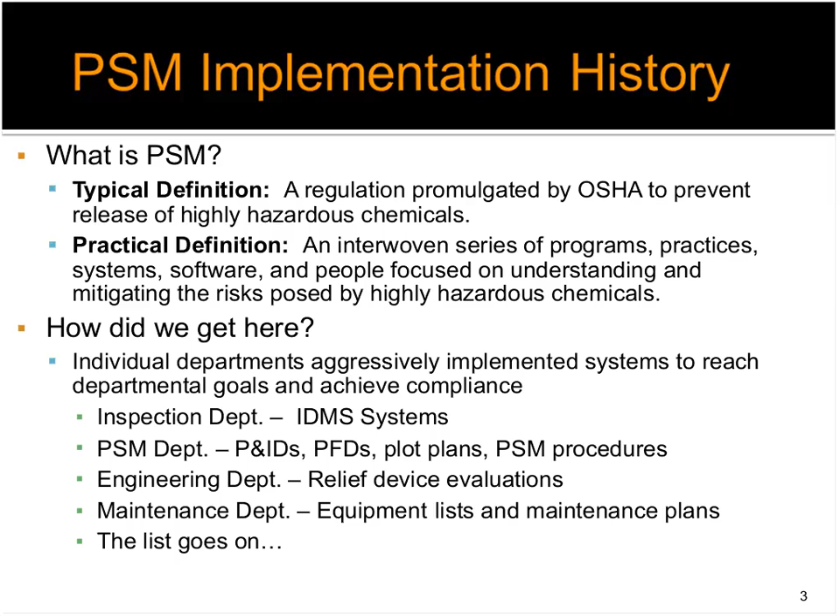And then maintenance departments had to implement maintenance plans and schedule maintenance routines and generate procedures. So you can start to see that PSM isn't just one component of an organization. It's not just one system, one process. It's really a series of different components, processes, and systems. And as I like to say, it's really interwoven.

So how did that leave us? Where are we now? Well, where we are now is we have lots of different systems and processes and databases, and similar process safety information, PSI, resides in all these different systems and applications. And that's really across many different departments. And today, each system, software, and application serves a purpose, and they must be maintained. You can't arbitrarily eliminate one.

So if someone came to you and said, hey, we have all of our pressure vessels listed in our inspection data management system, oh, and we also have all of our pressure vessels on our P&IDs, I think it would be clear that just because we have similar inventories and listings in those two systems does not mean we could get rid of one or the other. They both serve a distinct purpose and must be maintained.

However, when every system was implemented, there were some unintended consequences. One was redundancy of validation efforts. So in order to implement a system, you have to go out and validate certain information, whether that be walking down P&IDs or confirming equipment information. And since everyone did it individually, for the most part, there was a lot of redundancy of efforts.

Each effort really resulted in isolated data silos that are stored and maintained separately from each other. And what's even more unfortunate, they weren't structured to benefit each other. So you might have all your maximum allowable working pressures, MAWPs, for all your vessels in multiple locations: on your P&IDs, in your inspection data management software, as part of your relief system design. And that's just how things grew. They grew organically by each individual department, and that's where we are today.

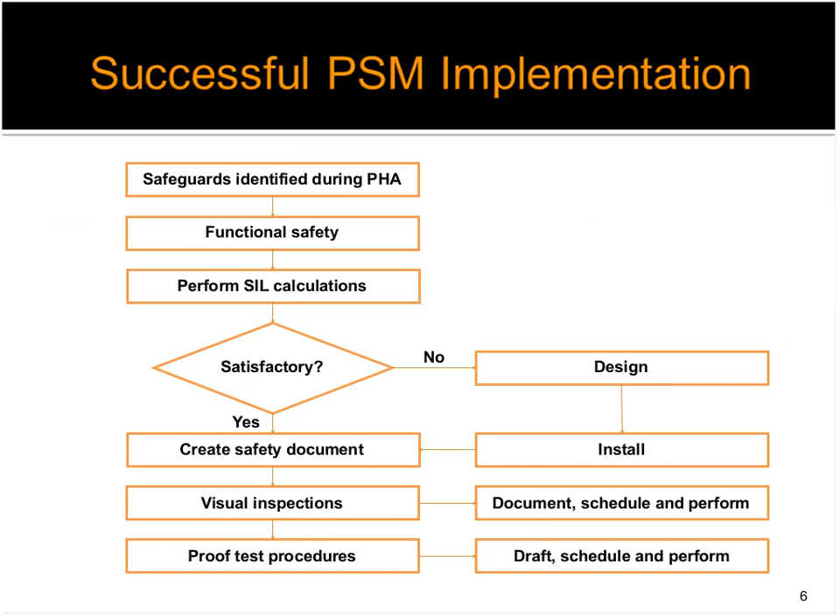Real quickly, I've talked about the different systems that have been implemented, and I've mentioned this emerging process in practice, the IPL Lifecycle Management. So as part of PSM kind of continuing and growing, I'm going to use this as an example to show you how to apply the 4 different components that I think breed success in PSM implementation and maintenance.

So just to get everyone on the same page, kind of similar to what I did with PSM history, when a PHA is held, you frequently identify different scenarios and the risks, and then you identify how those risks can be mitigated. And the way you identify the risks is through causes of abnormal operation and the consequence, and then you look at what safeguards and independent protection layers you have to protect against certain consequences. So you come up with a risk ranking, and then independent protection layers and safeguards are used to reduce the risk.

Those IPLs and safeguards then go through a life cycle management, and a lot of facilities and organizations are really now getting their hands dirty in this life cycle management. So they take those PHA safeguards, and then they feed them through a functional safety assessment to make sure that the way that the PHA understood the response is accurate. Then they perform some SIL, safety integrity level, calculations, to make sure that they will be as reliable as you would need in that particular scenario. If it's satisfactory, you kind of move on. If not, you redesign it potentially.

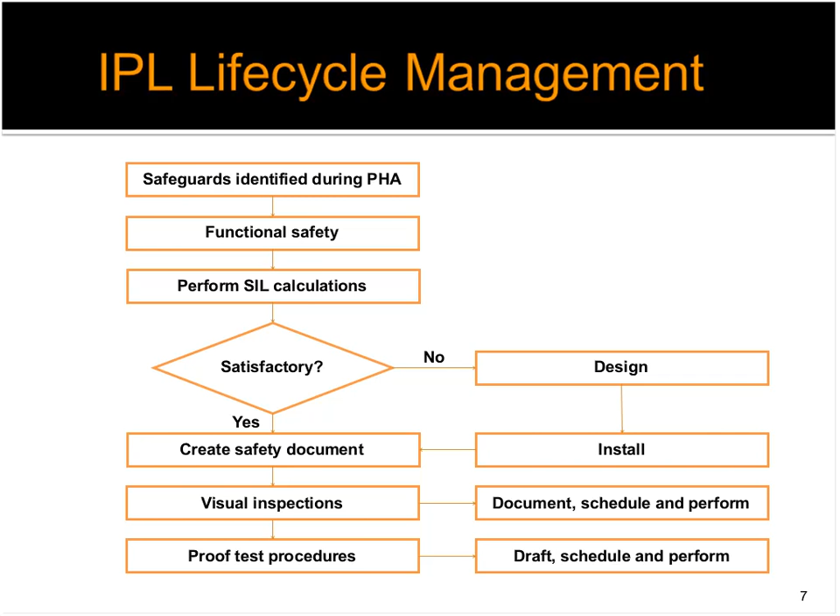Okay, let's go into the 4 components of successful PSM implementation. The first is employee participation. This is actually one of the 14 elements of the PSM standard. And this is the only one that I correlated directly to a PSM element. And I think this is much more than just compliance.

Whenever you talk about employee participation, this is not just the regulatory and kind of obligatory, hey, make sure you have the right attendees in a PHA. Let's make sure we have an operations representative and a process engineer and someone that understands the hazard analysis techniques. This is much more than just the obligatory attendance in a meeting.

This is about setting your culture. This is about buy-in from the right people. And this is really something that has to happen at all levels. I think frequently people talk about management buy-in to PSM. I don't think that enough attention is given to some of the other levels of the organization, the technician level, the operator level. Generally speaking, I think everyone sees the value, but they only see the value after it's been explained and after they understand it.

I think a lot of resistance to PSM programs is due to lack of understanding. They don't understand why they're doing certain things, why they're being required to do certain things, but with that understanding comes acceptance and even support. So one of the things I've always considered when I've been part of an implementation or maintenance of a PSM element or program is that teaching is a critical aspect of that implementation.

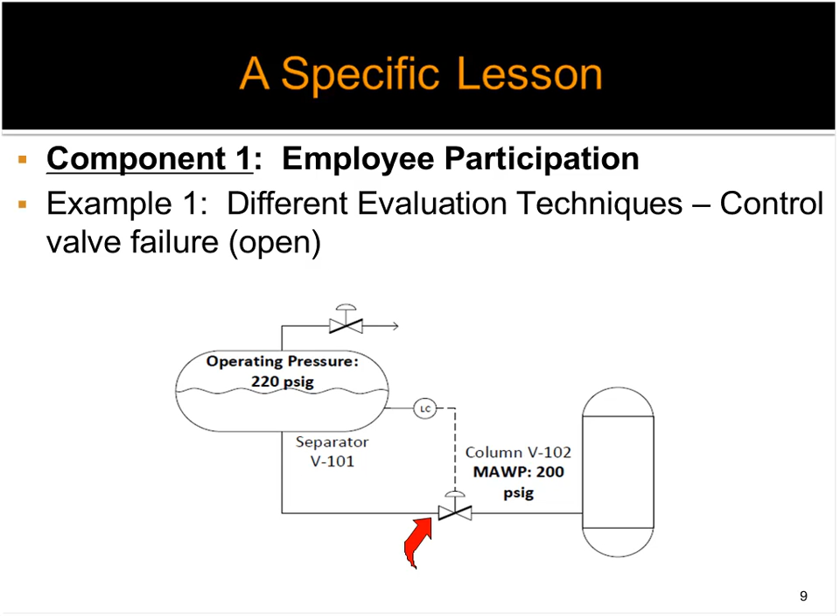So one of the frequently evaluated scenarios is what happens if that control valve fails open? Well, that is actually evaluated in a couple different ways. One, it's evaluated as part of the PHA. And as most people on this call know, PHAs take a very risk-based approach to evaluation of scenarios. They try to assess the risk of something going wrong, and they focus on the risk. So when a PHA looks at this, they may say, oh, well, if that control valve fails open, then we might lose the liquid level in the upstream vessel, and we could have what they call gas blow-by, so high-pressure gas blowing through to the downstream vessel that normally doesn't see that high-pressure gas.

Well, if it's operating at 220 pounds upstream, and the maximum allowable working pressure downstream is 200 pounds, then you're arguably going to overpressure the downstream vessel. However, in a PHA, they may say, hey, the operating pressure does not significantly exceed the MAWP, so there is no consequence of concern. Even today, a lot of operating companies are moving towards thresholds of overpressure in their PHA evaluations. So until they exceed a certain threshold of MAWP overpressure, they don't have any consequence of concern.

Well, what will that do? That will result in the PHA saying, oh, there's really no significant risk if that control valve fails open, at least no hazardous risk. It may be an operability nightmare, but it's no hazardous risk. And so therefore, they may not have any safeguards or IPLs if they're just focusing on safety and environmental impacts because there's arguably no loss of containment. However, another part of the PSM umbrella would be the relief system design. And frequently, they will look at control valve failing open.

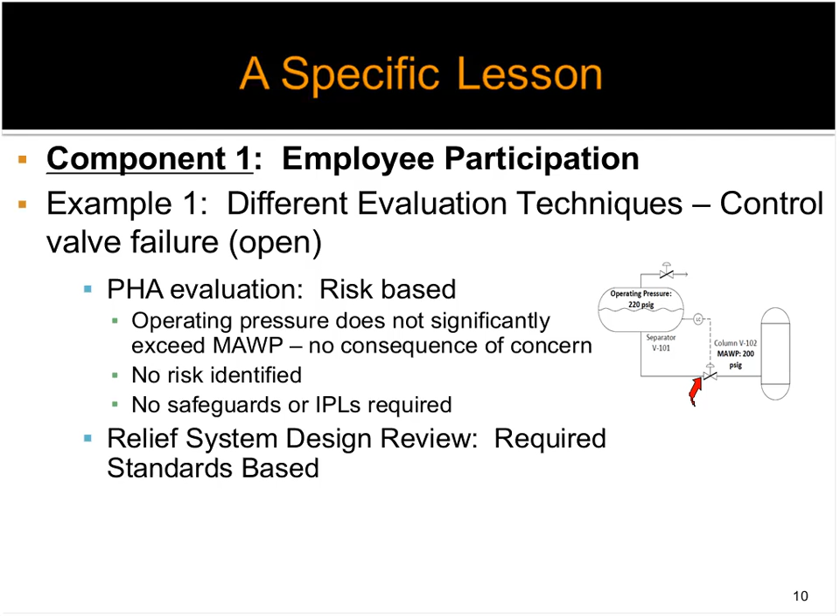And when you perform a relief system design review, this is much more standards-based, kind of prescribed methods of engineering evaluation. So what they will see is that the scenario will exceed the downstream MAWP. So if this occurs, we will exceed the MAWP. When that occurs, the regulations and the requirements and the design standards tell us you shall design a relief device to account for this overpressure scenario. So they would size it, they would look at it, and if they had any type of design concerns with that relief device, they would go out and fix them.

Now, the logical question you might have is, what in the world does this have to do with employee participation? Well, management will see both of these evaluations, and they will see the results of both evaluations are different. The employee participation doesn't necessarily mean participation in the evaluation. It means participation and understanding of what these evaluations will deliver. And so you can imagine some engineering manager receiving an engineering package saying we've got to redesign a relief device. And he says, okay, well, that makes sense. What was the scenario?

It was inlet control valve failure. And then he's just kind of curious. He's like, well, that sounds like we're going to spend some good money. I better go see what happened in the PHA. He goes and looks at the PHA, and this exact scenario says, don't do anything, arguably. So it starts to show some inconsistency in evaluation.

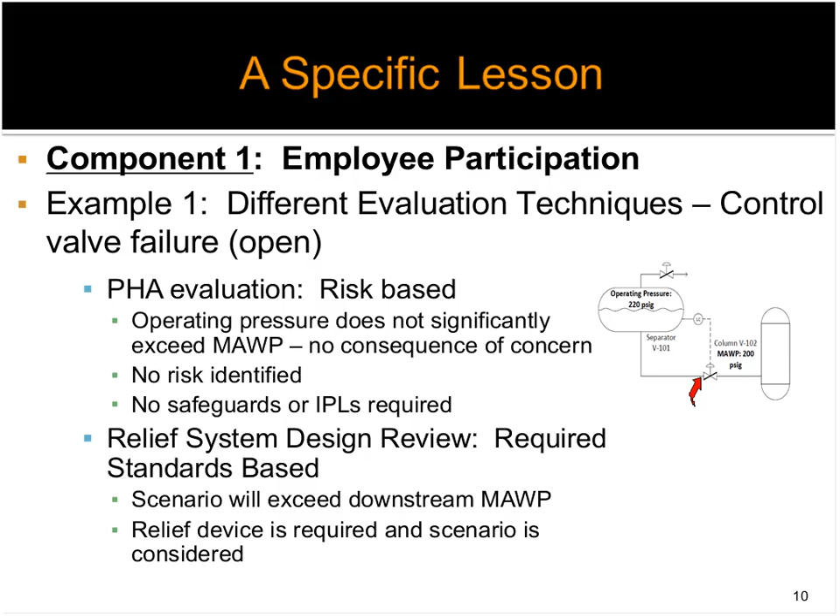Okay, so now how can we apply the component of employee participation to this new and emerging topic, IPL lifecycle management? Well, when you start to look at the IPL lifecycle management, you're going to start to plan maintenance for all of these different IPLs. And you need to start to involve all levels of maintenance from management through the craftspeople in the planning phases.

One deliverable of this is going to be testing regimes for all of your IPLs, potentially all of your safeguards. And for the most part, these are instrument-related type of devices. So basic control loops, alarms, safety instrumented systems. And so you're going to set up testing regimes. So how often you test it will be driven by what reliability is required to mitigate the scenario.

And you can imagine if you don't have the right people involved, you're now testing quite a bit of new stuff that you didn't test previously. That may require additional resources that you don't currently have. So if you were responsible for planning this IPL lifecycle management, you came up with all these testing regimes, and you just delivered it to the maintenance department, and they didn't have any awareness, all they know is that they've been dumped a bunch of work that they didn't participate in planning. That's not going to go over very well.

So the earlier you involve them, one, you'll get better deliverables. You'll know what the testing regime needs to be because, frankly, they've probably tested it before. They know where it fails. They know how to test it. And two, they can adequately staff for it. So that's part of the employee participation that I recommend in this area.

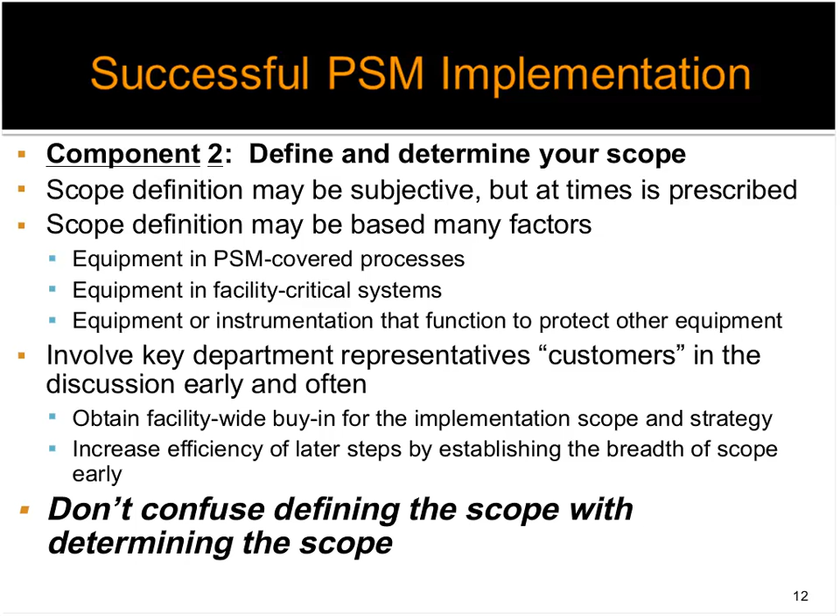So one thing I want to emphasize is don't confuse defining the scope with determining the scope. One thing that I think is frequently overlooked is if you decided you wanted to define the scope as all pressure vessels that contained highly hazardous thresholds of chemicals. That's a great definition, but then you got to determine what pressure vessels fall into that category. Well, you could say, just give me a listing of all of our pressure vessels. Well, that may not be as easy as you think. So one thing you may have to do is verify your equipment inventory, and you can accomplish that by cross-checking them against the systems you currently have.

Let's say that you were chartered with implementing mechanical integrity for fixed equipment at a midstream facility. Well, you may want to implement mechanical integrity for all fixed equipment that has certain thresholds of chemicals. Well, just getting that list may be difficult, and you may need to go to the different systems and repositories to generate a comprehensive listing. So check in between your systems to generate the reliable inventory, and you may find there are some system inconsistencies that will need to be resolved.

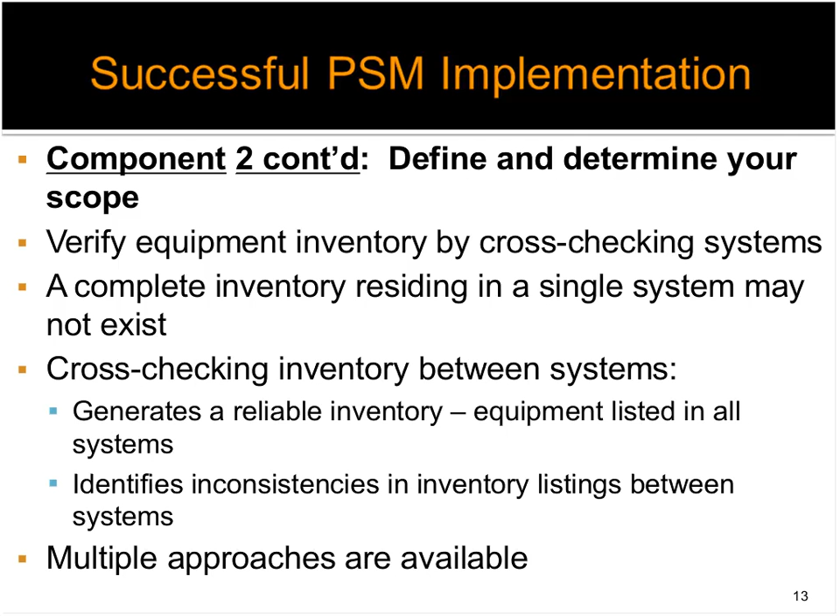Multiple approaches are available to generate that inventory. One would be simple Excel spreadsheets: do a dump from different data repositories and compare them, and you can have a resulting scoping list. You can also use some commercially available applications to do that.

So, one specific lesson in defining and determining your scope: relief device studies. Frequently, relief device studies are contracted out. So they want to do a comprehensive facilities evaluation for all your relief devices. They'll frequently just send a list to a contracting company and say, hey, give us a quote and a work scope to perform this evaluation for our entire facility.

Well, you need to really be careful that you don't understate the work and that you also don't overstate the work. One example would be if you just simply take a listing of all the relief devices from, let's say, your financial system like an SAP, and you send it and say, hey, please give us a scope of work and a cost to perform evaluations on all these relief devices.

What you may not know is that the relief devices that are on the hot water heaters in your office buildings are part of that list. And now you're asking an engineering firm to perform a study on, frankly, a pretty standard relief device that you may not want to spend the same effort and energy in evaluating as you do on one on your debutanizer column in your facility. That's an example of overstating the scope.

An example of understating the scope would be if you only provided a list of relief devices to be evaluated. Well, frequently there's vessels in the facility that aren't protected. That doesn't mean you don't need to study them. You still have some regulatory obligation to document why a relief device is not required. So if you just simply say, hey, study all these relief devices, and then you don't document why certain vessels don't require a relief device, you're arguably still out of regulatory compliance.

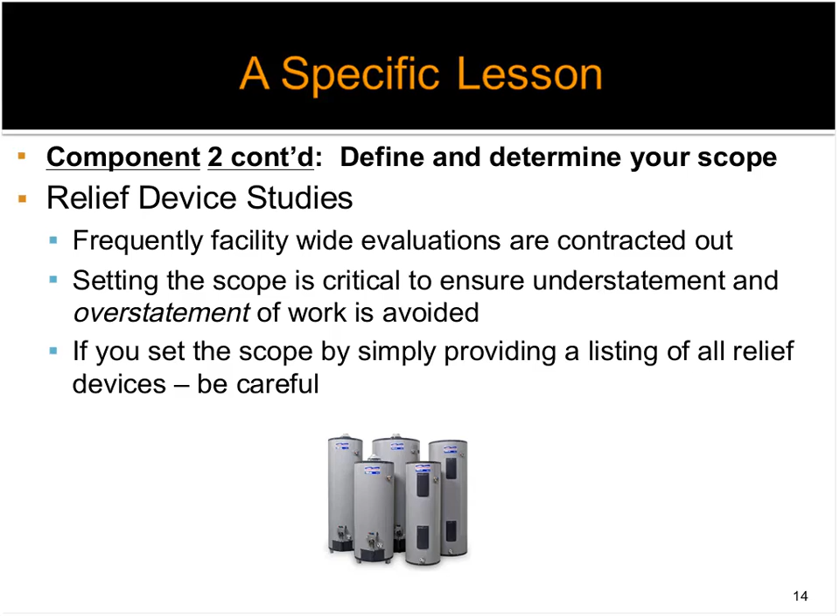So how would this component number 2, define and determine your scope, impact the emerging topic of IPL lifecycle management? Well, one question that I frequently see raised is, what do we need to include in this lifecycle management? Is it all safeguards identified in a PHA? Is it just the IPLs that are generated out of a LOPA study? Should we list additional IPLs in a PHA or additional safeguards that we don't need for risk reduction? And then what do we do with that list?

So ultimately, you're going to have to select and choose what devices you're going to maintain, what IPLs you're going to enter into this lifecycle management. And it could be all safeguards in a PHA. It could be all IPLs.

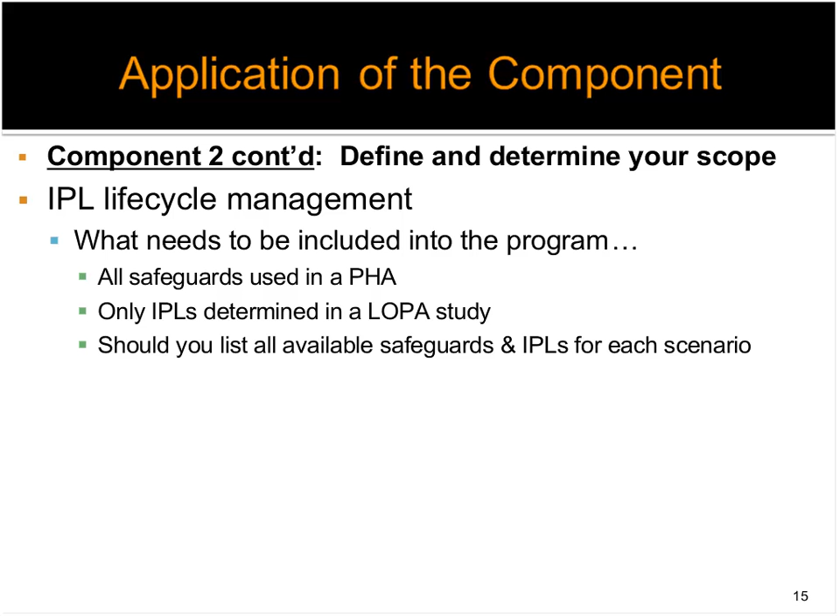Here's another kind of interesting situation that will arise. You may perform your PHA, you may even perform a LOPA, and you could have a safety instrumented system in your facility that the PHA and the LOPA do not take credit for. What do you do with that safety instrumented system that already exists? Do you now not maintain it at all? Is that in your scope? Is that out of your scope? It wasn't used by the PHA or LOPA. Do you need to maintain it, and if so, how? So all these questions need to be answered. That's what sets your scope.

The third component of a successful PSM implementation is determine what PSI is required, where it exists, and how to validate it. So one very effective way to determine those 3 components is to perform a pilot study or a proof of concept. And that's not to determine, are we going to go forward with this effort? It may well be, but most often it's not. It's really to provide a sound basis for the overall effort. What the cost, schedule, and scope is going to be can really be determined with a pilot study. It can be much more effective.

It also allows you to determine what information is required for success. So if you are going to go implement a comprehensive P&ID walkdown, then you would need to understand, well, what information are we going to put on our specification blocks for our equipment? What are we going to show as far as piping? Are we going to have a threshold that we're not going to show any size below? We're not going to show any 1/4 inch tubing or less. So you need to determine all that, and working through it, doing the pilot study, actually helps you determine and locate those questions that you may not otherwise ask.

Also, if there's a specific software that you're going to leverage or utilize as part of that implementation of this PSM process, it allows you to vet it and test it. Frequently, those are chosen for you. Corporate IT comes to you and says, thou shalt use this software, and you're welcome. Well, frequently you need to use that software in order to understand what its strengths are and what its weaknesses are, and whether you might have to backfill its weaknesses and what its strengths really can be. So it allows you to really understand what the software is good at doing and where it may not be so strong.

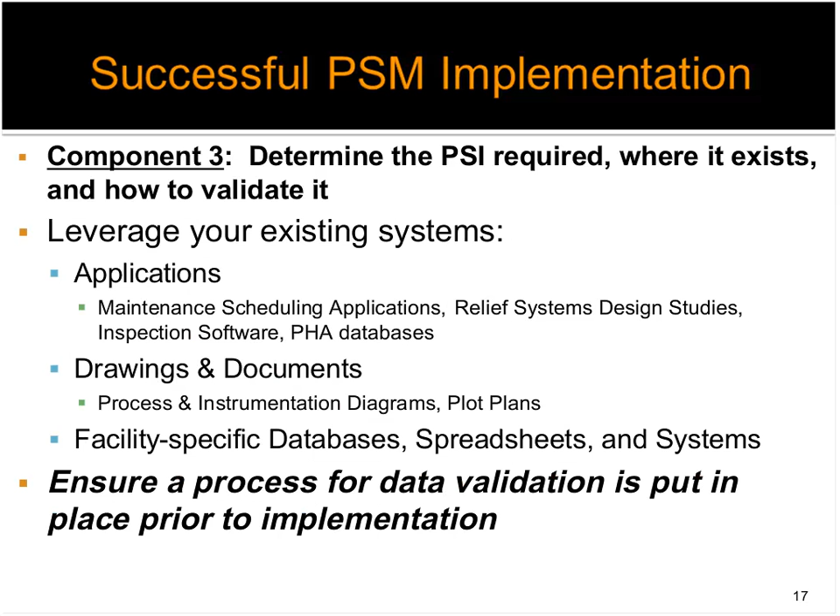Again, leverage your existing systems. You may already have a lot of this data organized and captured. But one thing that is incredibly important, ensure you put a process in place to validate the data that you're going to use. So, the accuracy of the data matters. And I will strongly encourage people, the correct value should always be determined as the as-built condition. And I'll go through a few examples in just a minute.

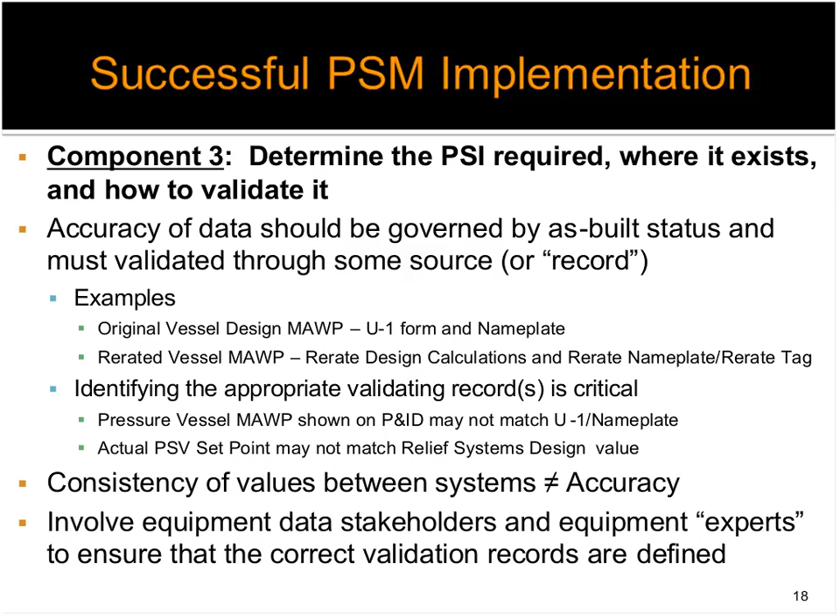So what determines the as-built condition? For a pressure vessel, it would be a U1 form or a nameplate. If you have a re-rate, it would be the re-rate calculations and the re-rate tag. And then identifying the appropriate validating records is critical. So simply because all your data systems have a specific value does not make it right. And I'll go through one specific example to where it's very obvious.

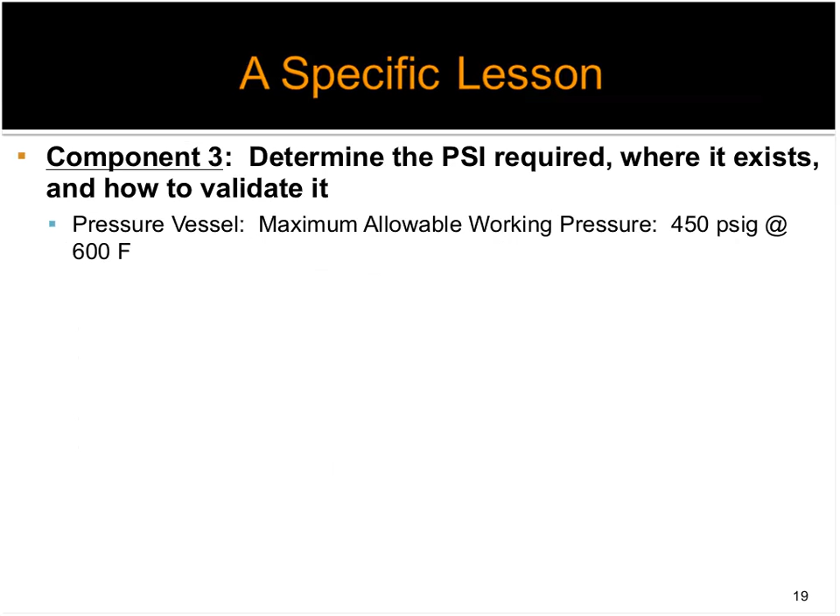So here's the example. Let's say that we were just now implementing the PSM system, kind of an overarching umbrella of all things PSM, or we're setting a facility that historically wasn't PSM, but because of some potential future regulatory changes or changing of preference in the corporation, you now want to implement PSM at a new facility. Okay, so you have a pressure vessel, and its maximum allowable working pressure, its MAWP, is 450 pounds. 450. Okay, great. How did I get to that?

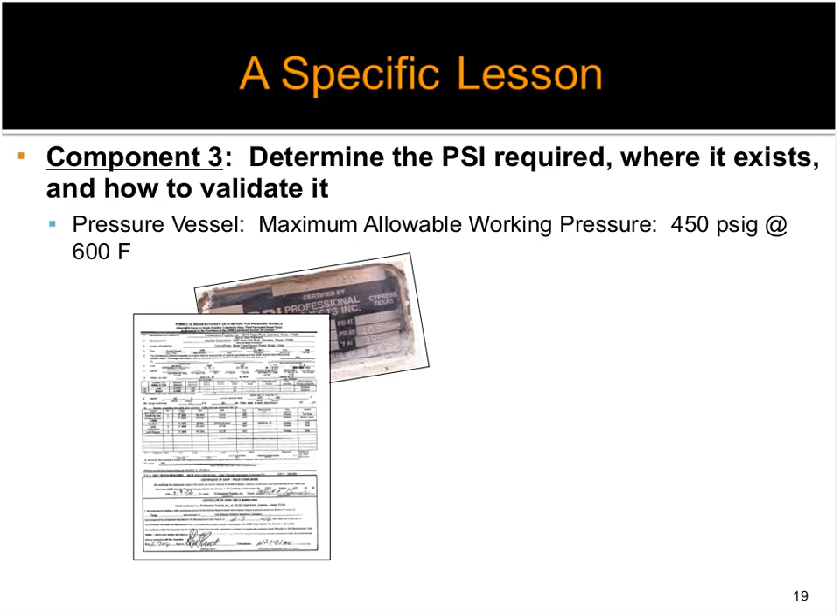Well, it came off of the U1 form, and it came off of, not the re-rate tag, off of the nameplate. So we know that that is valid. This has never been through a re-rate. We can trust that documentation. So we know it's 450. Well, we have to implement it into our inspection software. So we'll implement it into the inspection software, and we're going to use 450 pounds, which is the right value.

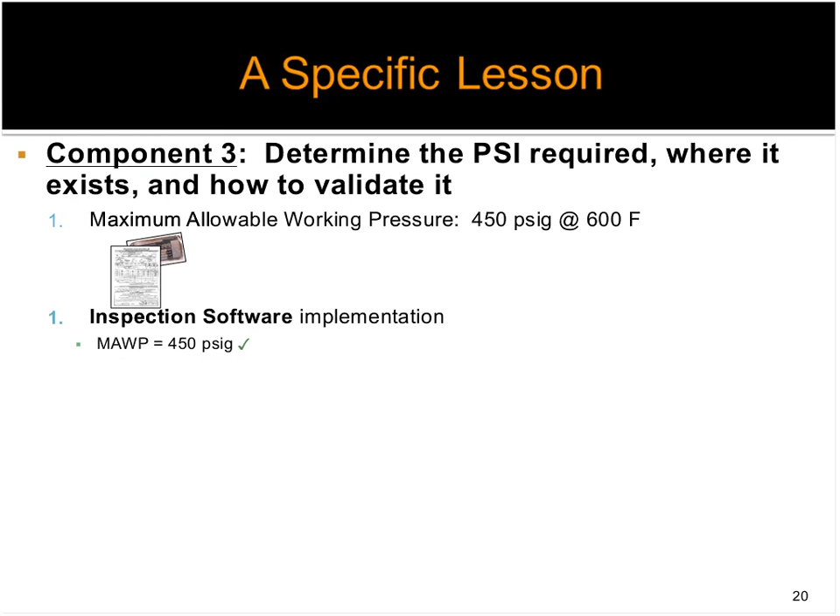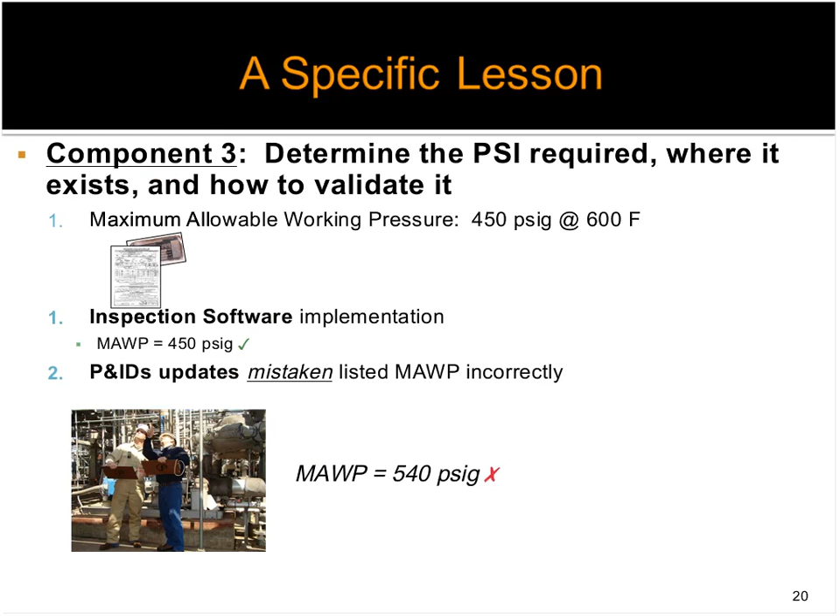Well, as part of our ongoing PSM efforts that we historically have not performed, we're going to update the P&IDs. And the way we're going to update our P&IDs is we're going to walk down the P&IDs. We're going to put people in the field, boots on the ground, and walk down pipe. Well, when they were out there, as good field walk-down resources do, they look at the nameplates. And this gentleman looked at the nameplates and read it and said, oh, absolutely, and wrote it down incorrectly. So instead of writing 450, he wrote 540. Not too extreme of a mistake to make. So now the P&ID gets updated with MAWP of 540.

Well, what can that lead to? Well, let's say that now you're going to do a relief system evaluation. Frequently, relief system evaluations are based on the P&IDs. So you deliver the P&IDs to the relief system engineer, and we say, go. Go do your thing, sit in your cubicle, and calculate. And so they start cranking through the calculations, and they refer to the P&IDs, and they see that the MAWP is 540 pounds, which is wrong. And it's wrong because that's not the as-built condition.

Furthermore, the PHA is performed, and they, again, use the P&IDs, and they evaluate all the scenarios, they evaluate all the risk, they evaluate the entire risk study using the wrong MAWP. What's even more frightening is they may even take action on it. They may evaluate it and say, well, if we overpressure, boy, we sure would like to have an alarm. Yeah, we all agree, let's configure an alarm on that vessel.

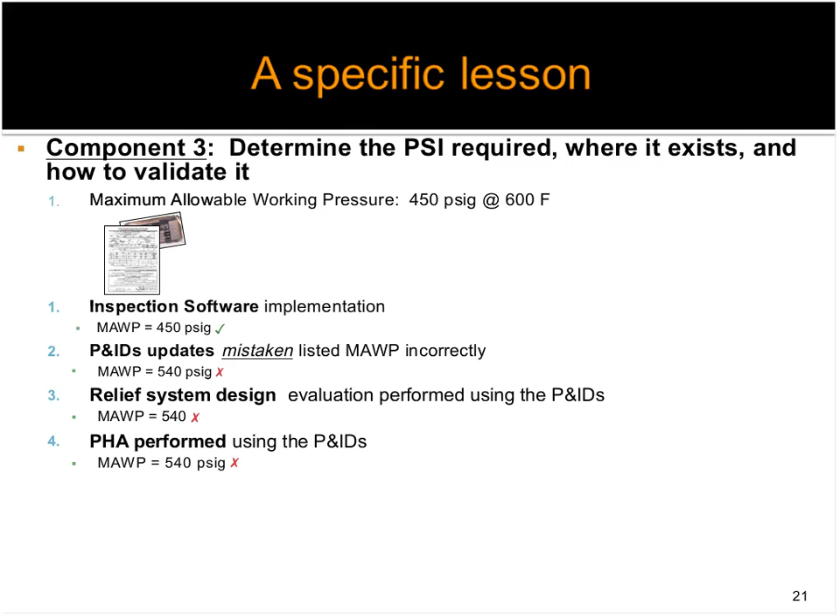And where should we have that alarm? Well, we want an alarm 10% below the MAWP. Well, if you did that, you're still going to be well over the real MAWP. So you may even take actions that are incorrect. So I hope I don't have to tell you the results. The result and the problem is that that vessel, its structural integrity is only good for 450 pounds, but every other evaluation assumes it's good for 540. And all of this was caused by the simple switch of the numbers, and it's not too extreme.

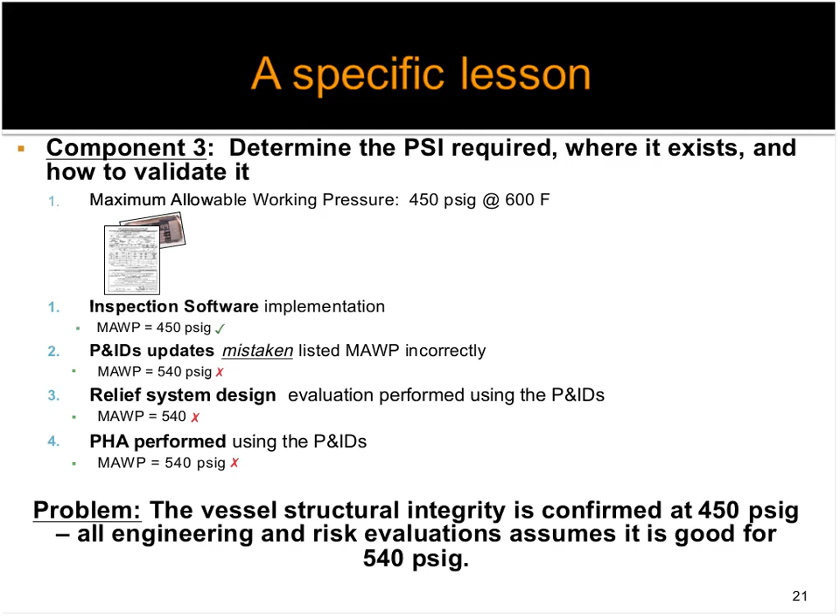So why is this important? You've got to make sure that you have a way to validate the data so that when you're implementing your relief system, when you're performing your PHA, you can say, hey, did this come from a bedrock document, and you can confirm it. Now, how can that play out in this emerging topic?

So part of IPL lifecycle management is you may frequently take credit for an operator response to an alarm. So an alarm goes off, an operator is going to take some action to prevent this scenario from pursuing any further. Frequently, the response time is very important in determining whether that is an adequate independent protection layer or adequate safeguard. So if you don't have the right alarm value, you may be calculating an incorrect time.

The pressure is rising at a certain rate. If your alarm is higher than what you think, when you get that alarm, you have less time to respond than what you actually think. So I will suggest, again, and emphasize, whenever using process safety information, use the as-built condition. Now, it's incredibly tempting to use other information when you're looking at IPL lifecycle management.

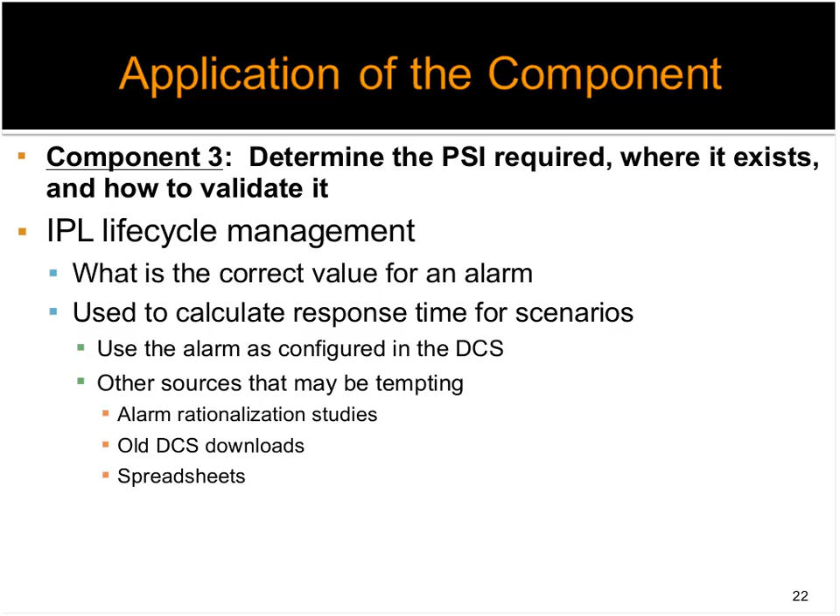There's been huge efforts to go through and do alarm rationalization and alarm evaluations at facilities, and they've generated an immense amount of valuable data. And they'll say, hey, this alarm should be set at this value. Don't use that in order to determine whether your IPL is valid, because that change may be what you want it to be, but it's not currently what it is. And so all those other sources that could be tempting, I would encourage you not to use. Go directly to the DCS. So that is how you would apply component number 3. Make sure you understand the data you need, where it may exist, and then how to validate it.

The fourth, and I mentioned this earlier, leverage the PHA. If we were to walk back 20 years in time, I think most people would argue, yeah, we understand the value of the PHA, but I think the true value that it's generating, that the discussions generate, that the documentation generates, was probably never quite expected. And I would argue on the good side. So the thing to consider is that the PSM implementation, the system you're implementing, really needs to fit into the existing site puzzle, not only in the PSM umbrella, but how it interacts with non-PSM programs as well, but PHA in particular.

One thing that's incredibly frustrating is PSM implementations frequently need lots of information from lots of different people. You need process engineering knowledge, you need design knowledge, you need instrumentation knowledge, you need inspection knowledge. And that's not just for PHA, that's for a lot of different process safety management exercises. So what's very frustrating is that you will frequently be implementing something and call on all these people and say, hey, when you operate this vessel, does it normally run at this level? Do you see any type of contaminants that could create a new corrosion mechanism? So you'll have a lot of the same questions that are already addressed in a PHA, or at least discussed.

So the one thing that I would argue makes very successful PSM implementations is to determine if the PHA has already documented what your implementation requires. A great example, risk-based inspection. One of the things they look at is different damage mechanisms that could occur to fixed equipment. And one thing that drives damage mechanisms is potential for impurities in feedstock. And if you have certain impurities, you could create new damage mechanisms.

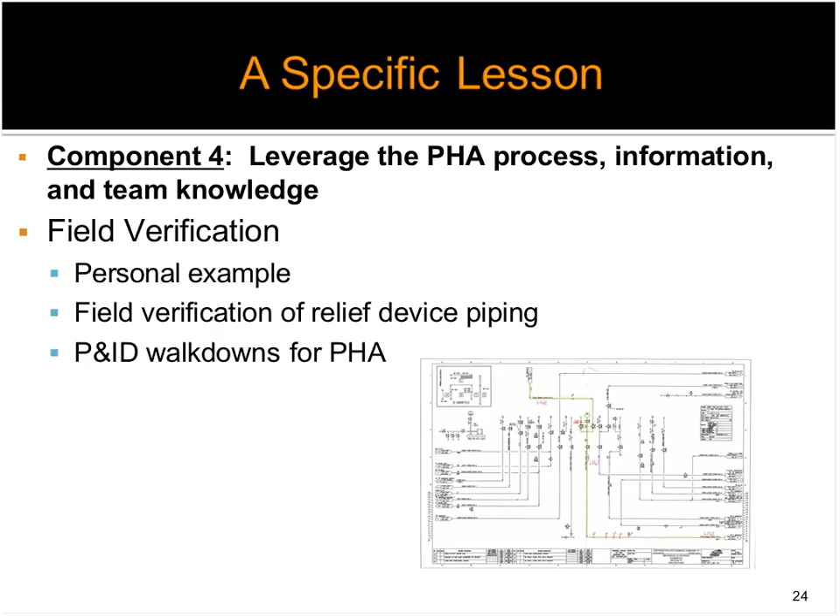And so that's not leveraging the PHA process. If we recognize that, hey, we're going to walk down this pipe for the PHA process already and we're going to get this P&ID accurate, why not use it elsewhere? Now, how can we leverage that for the IPL lifecycle management? Well, IPL functional verification is one component of that lifecycle management. When a PHA takes credit for an IPL, it also discusses how it should respond. So in the event of high pressure, this basic process control will receive a high pressure signal and it will close this valve. Or our safety instrumented function will respond in X, Y, and Z way.

During the PHA, that is discussed usually pretty detailed. And a lot of discussion says, well, are we sure? They'll pull up loop sheets, they'll pull up cause and effect diagrams just to confirm that the IPL responds as expected. So one component of the IPL lifecycle management is to confirm that. And the reason that they are taking that additional step, I will argue, is because the PHA documentation sometimes isn't adequate enough to show that that has already been confirmed, or the PHA didn't confirm the functional requirement.

So they'll say, hey, we expect the basic process control, and they'll say, oh, yeah, we get high pressure, and that closes. Well, later on, when they do the validation, they'll find out, oh, actually, when we receive high pressure, that doesn't close control valve 102 at all. It does something else. If that validation was just, I'll say, tacked on to the PHA, you can imagine the efficiency savings. Because all you're going to do is go revalidate it after the PHA takes credit for it.